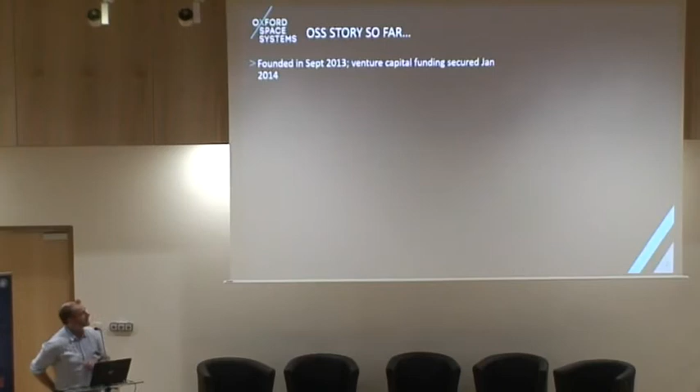So let me give you the quick background. Here's the short CV of the business. I founded the company back in 2013, but only really got going when I secured some significant venture capital investment in 2014. So I'll save you doing the maths. We're coming into our 5th year of life. And what we're doing is developing a new generation of deployable structures. And this is antennas, boom systems, and panel arrays.

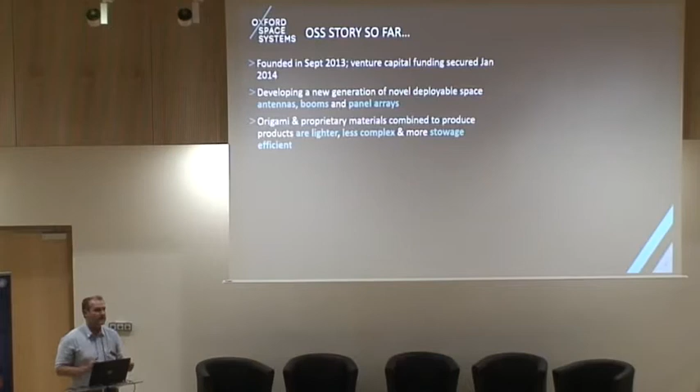But what we're doing differently, and the reason we managed to raise the level of VC investment we have done, is our approach is a lot different. We're very commercially focused, and we use proprietary materials that we're developing ourselves. And I've got an example here today. So you're obviously very familiar with carbon fiber. For those of you with fishing rods and tennis rackets, maybe if you're rich enough, a car, you could actually appreciate carbon fiber. Normally a thick, rigid material, not normally very flexible.

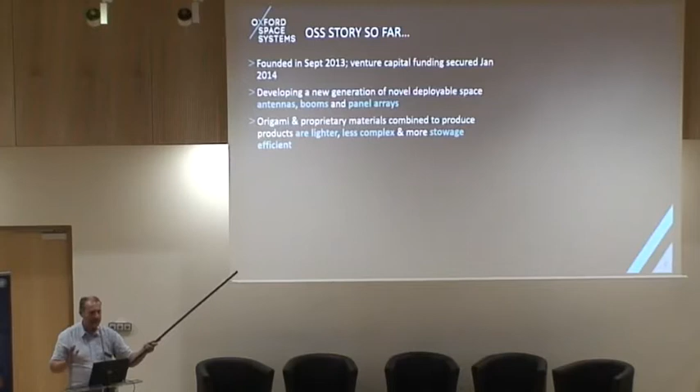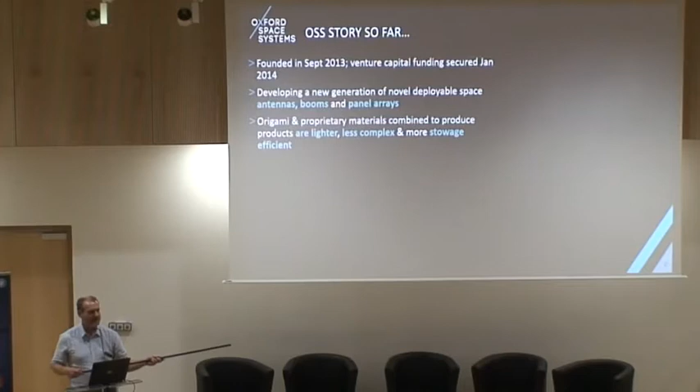So part of our intellectual property is playing around with the formulation of that material to make it do interesting things. So here's a carbon fiber roll. We can make it into a self-deploying structure. Now, deployable carbon fibers aren't new, but the IP we've developed is making this robust enough for the space environment and being able to predict its behavior when you subject it to things like atomic oxygen and radiation. So this is a simple material. This is the simplest thing you could ever make. I'll show you how we turn this into a product in the following slide deck. I can use it by throwing it around as well.

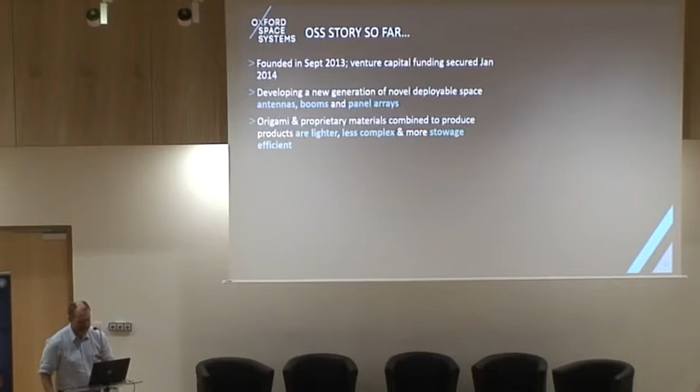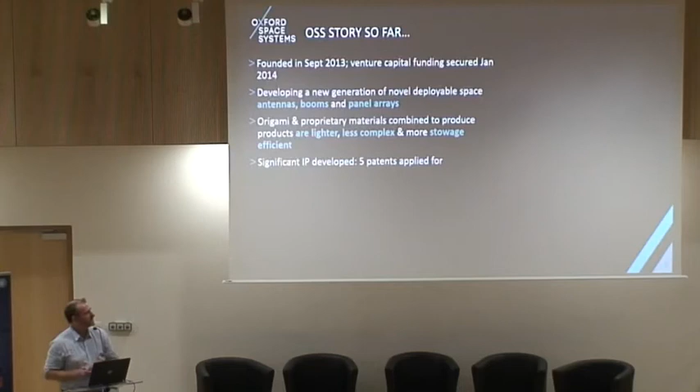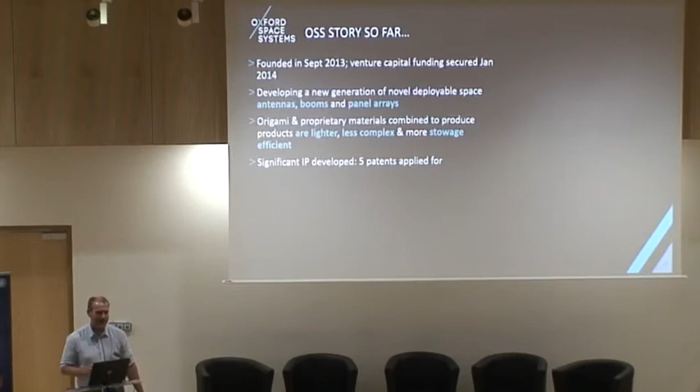So we develop a lot of intellectual property. We apply for formal patents. This is the stuff that investors get excited about, how much intellectual property collateral you have in the business. But I get more excited about IP that I call protection by complexity. So I can show you this material. It doesn't mean you can instantly go away and replicate my intellectual property. It's a bit like the Coke formula. So that IP is actually a lot more valuable than things we can put into patents.

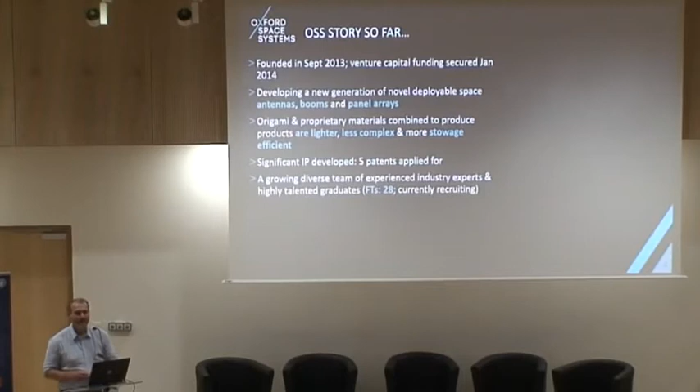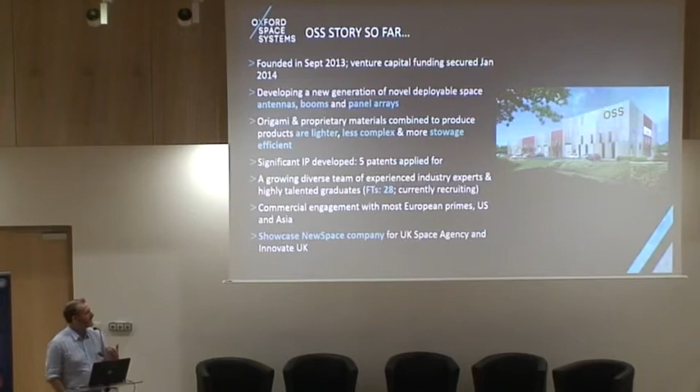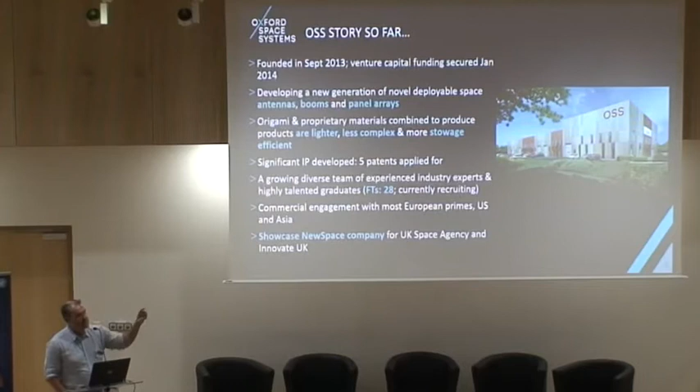We actually have contracts with most of the European primes, as well as satellite builders in the US, as well as Asia. So we've got some great commercial action. And we find ourselves the showcase so-called NewSpace company for Innovate UK, which is the UK government's innovation agency. And anytime there's overseas promotional activity for the UK, invariably OSS gets dusted off. And this graphic is aspirational, but it will be reality next month. This is our new headquarters that we're building in the UK to accommodate our commercial expansion.

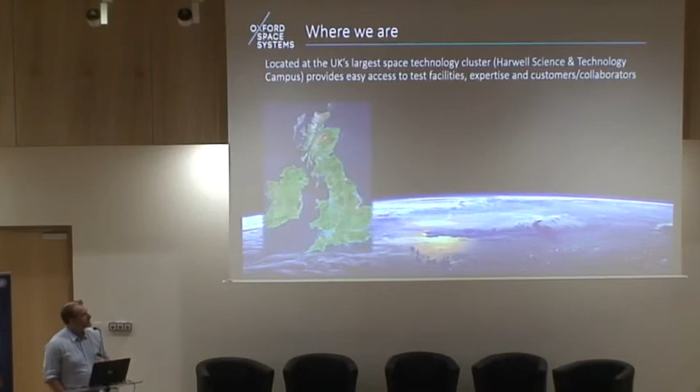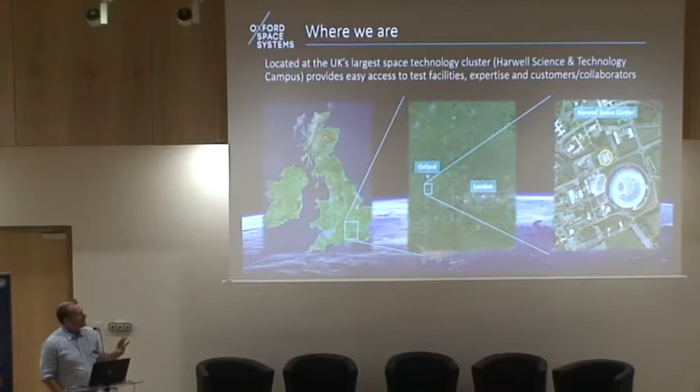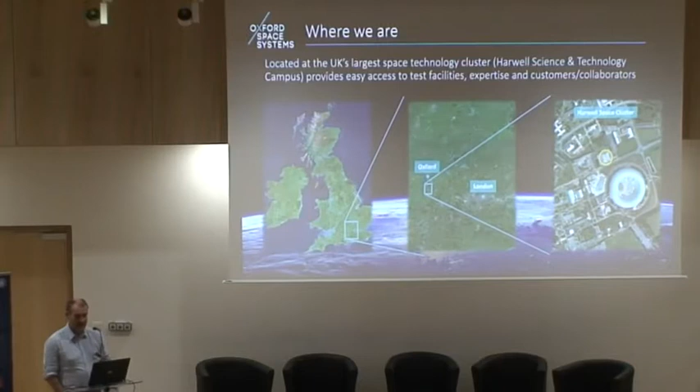I'll show you exactly where we are in the UK. We're about an hour outside London on the largest science and research campus in the UK. About 6,500 people now on campus. 80 space companies are actually there, employing over 800 people. And the government recently announced a £100 million expansion of RAL Space. So some colleagues from RAL Space are in the audience, so congratulations on a £100 million expansion to your facility. And that's actually putting in place more thermal vacuum chambers, environmental test facilities that commercial companies and academia can come and use.

Okay, on to what I want to talk to you today about. So this is a live development we're currently doing for a US customer. For reasons of confidentiality, I can't name the customer, and I've had to redact some of the material, or I hope the show has redacted some of the material, but we'll find out. So it's about developing a deployable parabolic antenna.

Ultimately, the customer wants a 5-meter unfurled antenna that will fit, ideally, on a 27U spacecraft. That's the challenge they've set us. They're willing to go with a 2.7 meter diameter for their first IOD. So we're under contract to demonstrate our capabilities to give them a 2.7 meter antenna, to produce this first TRL3 breadboard.

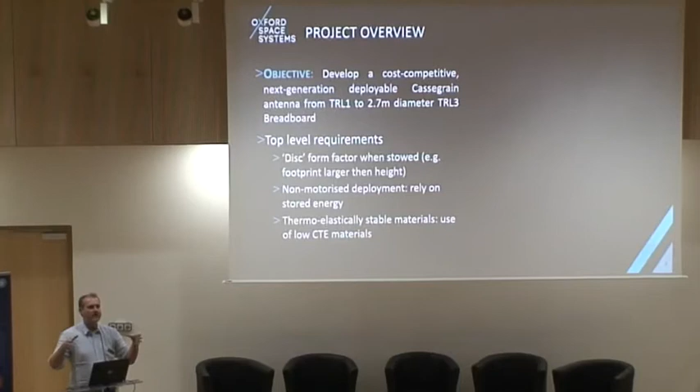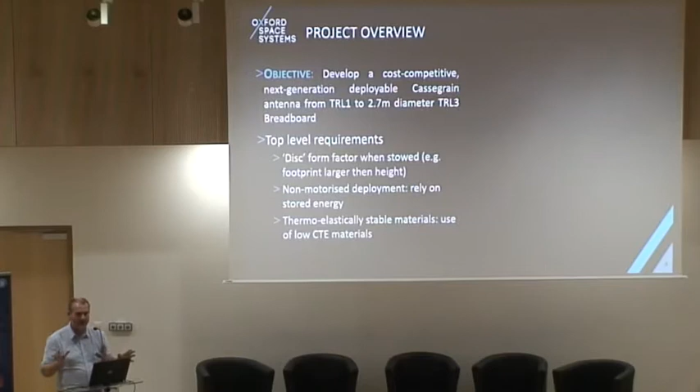So the top level requirements they set us: they're calling it a disc form factor. It looks like a sort of large donut when stowed. This is the target. They want it to sit on top of a 27U craft. Mass, as ever, is the general concern, so no motorized deployment, we don't have the mass for it. So they want it to rely on stored energy. And of course, it has to be thermoelastically stable materials to survive the space environment.

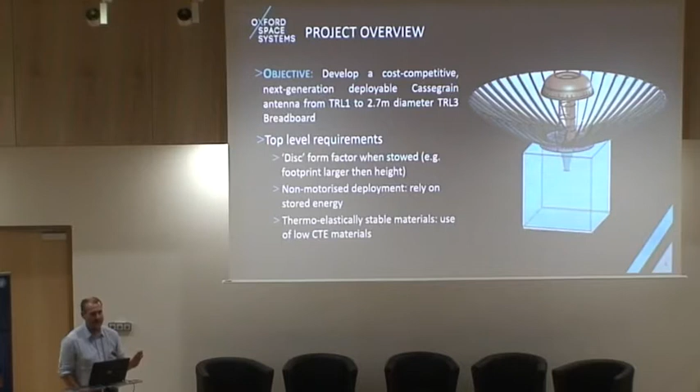So here's a very simple CAD image of the target that they've set us. And of course, being a commercial project, it could cost nothing and be ready next month. That would also be desirable. So very, very aggressive commercial timelines. To give you an idea of how fast we have to move, if they like what we're doing on this breadboard, they will want flight hardware from us within 14 months. Otherwise, we won't get the contract. That's how aggressive the US colleagues can be.

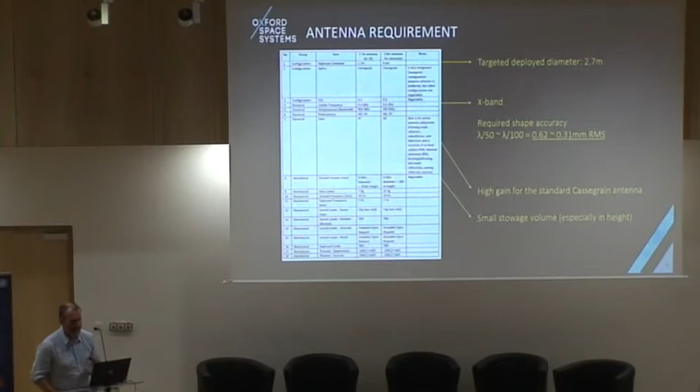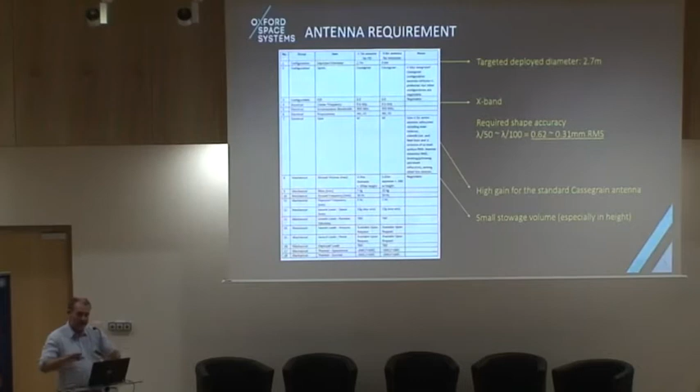Okay, I won't labour all the way down through the specification. But the top lines are: it's a 2.7 meter architecture operating at X-band. So you can probably guess the application. And that translates into the technical challenge of RMS surface accuracy, just how precise this parabolic needs to be when it's deployed. If you crunch the numbers for this typical mission, it comes out around lambda over 50 to lambda over 100, which translates into 0.3 millimeters of RMS surface accuracy across the entire parabolic, which is a pretty tough challenge for the deploying structure.

It's a Cassegrain configuration, which means we need a primary reflector and then a secondary reflector. Of course, the other thing is, as ever with CubeSats, the stowage volume is also an important concern.

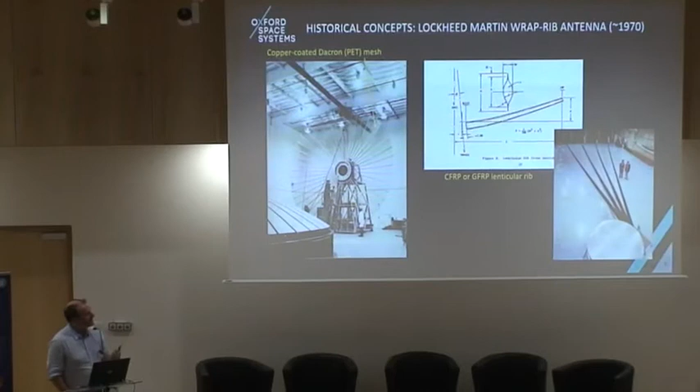So why are they using such large antennas? Well, Lockheed Martin come from the US Department of Defense background. Therefore, officially, no one knows what they're doing with these. But it's Earth observation and eavesdropping. But of course, if you come from a US DoD background, cost is not your concern. They don't really care how much these things cost, as long as they work. Our challenge is a very cost-effective architecture that's compatible with CubeSat budgets and Microsat budgets.

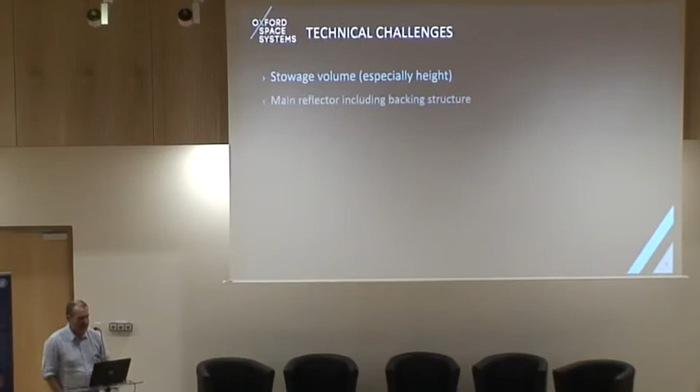So combining that knowledge of how you fold structures in a really novel way without creasing the surface is something we're now using. So we're actually building on a lot of work done by them. So the technical challenge, as I mentioned, it's all about stowage volume. That's an especially height constraint in this particular application.

I talked about the reflector backing structure being a big challenge. Ultimately, they want 5 meters. We're doing 2.7. And the reflector materials themselves, we want them strong enough, stiff enough to give us a reliable reflector surface, but we want them to stow as well without damage and survive.

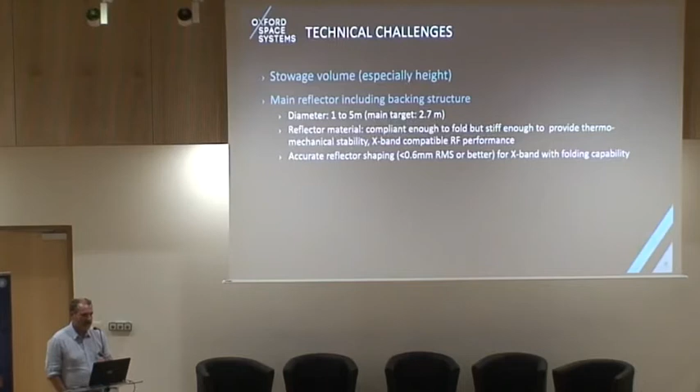In this particular application, it's X-band. Ultimately, we want this architecture to work up to Ka band, and that's a development we actually started in the summer with some support from the space agency.

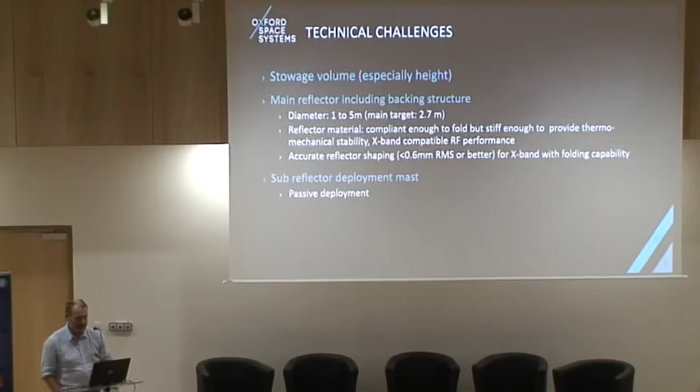I mentioned it's a Cassegrain antenna, which means we need a sub-reflector. And we set ourselves the challenge that, once again, we can't have motorized deployment for this secondary reflector. So, like the primary reflector, it has to be passively deployed using stored energy. Of course, if you're deploying something into the field of view of your primary reflector, the last thing you want it to do is impinge on the RF performance. So we want this to be RF transparent if we can.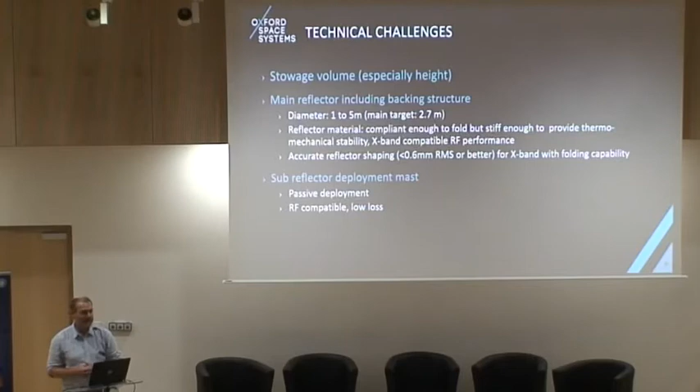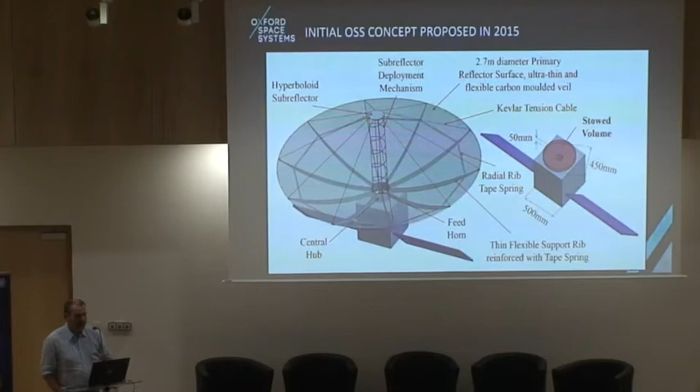So here is our early architecture. This is going back to 2015. This is when we first started talking to this US customer. You can see how we were evolving our thinking. You can see when it's deployed, we have some Kevlar cords, tension cables coming down. We actually discounted that, saying it was too complicated and was adding too much cost to the design.

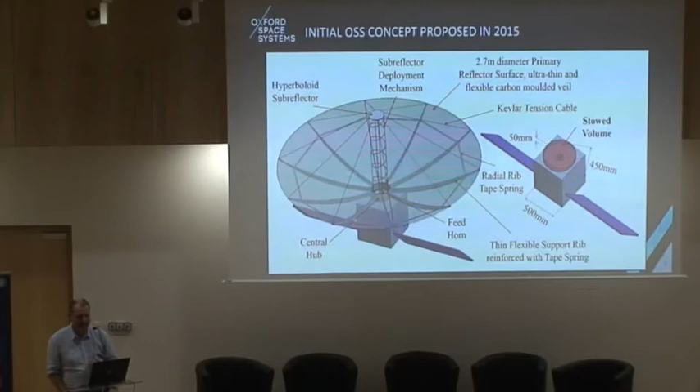So actually what I'm going to show you now is a refinement that we're currently working towards. You can see the size of the craft, roughly 500 millimeters by 450. Ideally, they want to get that a little bit smaller, as I said.

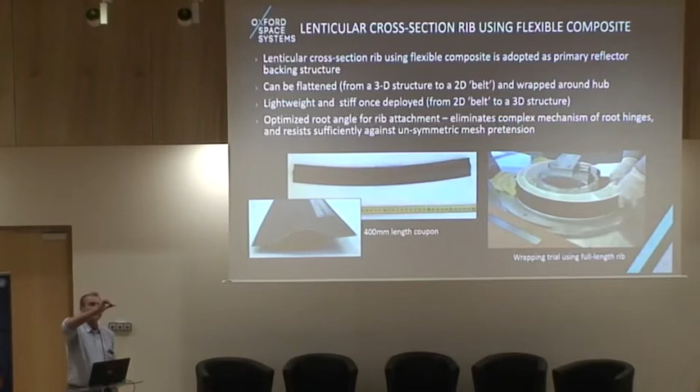So, taking our composite expertise, we designed and developed a very low-cost lenticular rib. And the screen's not fantastically bright, but I've got a little section here, probably the world's shortest lenticular rib. See the construction and hopefully the shape. And this will stow and bend as well. The bending is very small, but you get the principle.

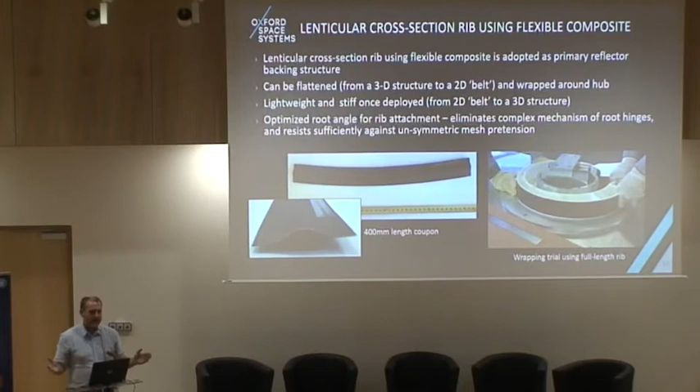So it's actually two sections of carbon fibre together, welded. Overcoming separation and delamination is one of the challenges that we've established on the project. These structures actually contain a lot of energy, so the challenge is how we wrap these carefully and repeatedly without damaging them, but also in such a way that when we release them, there's a controlled release of energy. So a lot of time and effort spent doing this internally to make that work.

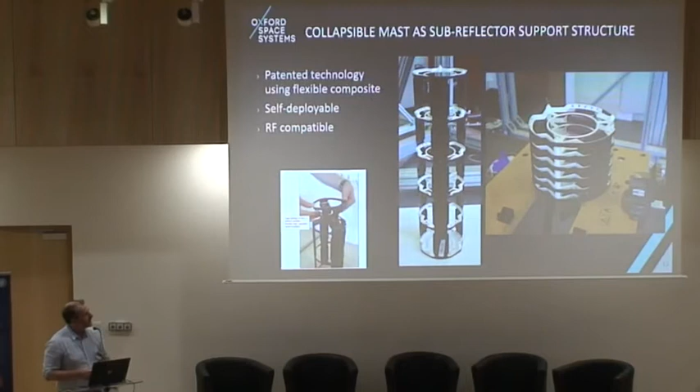And I can't tell you the exact formulation of the material because we did manage to crack the problem of making this not only RF transparent, but surprisingly compliant to this particular application. We have a patent in progress for this particular design.

As ever, it's not just a mechanical structure, of course, it's an RF structure. So I have some pretty heavyweight RF expertise on the team, so we did a huge amount of RF analysis, convincing ourselves this was actually going to behave as an antenna.

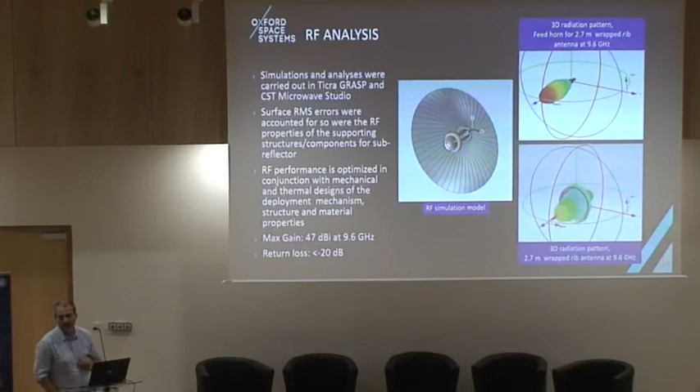I've been told this is a pretty good set of results, with a maximum gain coming pretty much close to what you can expect theoretically from this type of configuration.

No one is shouting out, so I'm assuming there's no RF expert.

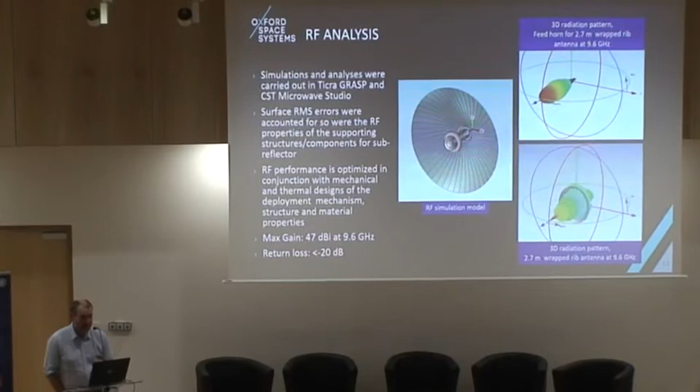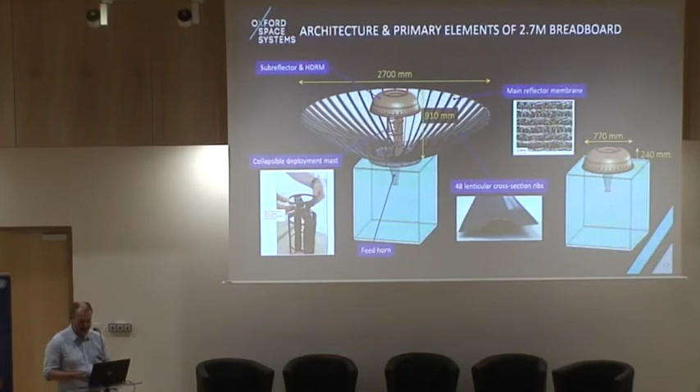So we looked around, could we make a flexible carbon fiber skin? We do actually have one of those on a separate development. But we actually started development of our own proprietary metal mesh. So for those of you that haven't seen antenna metal mesh, it actually looks a lot like ladies' tights, believe it or not.

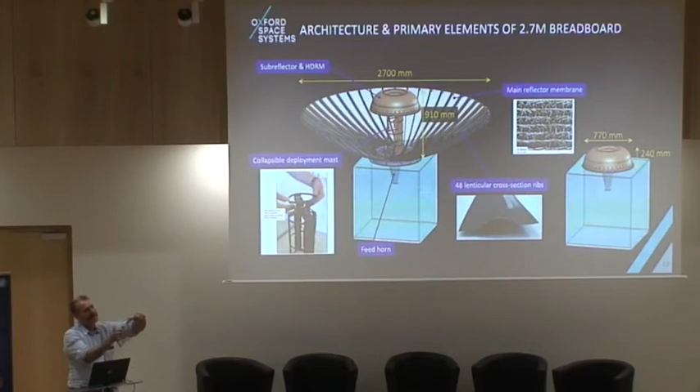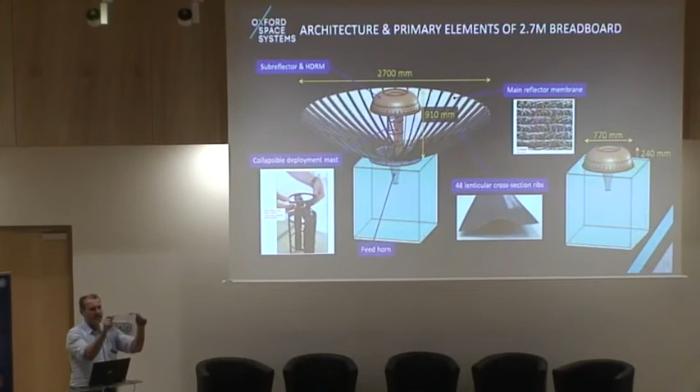So it's pretty indestructible. I think it's probably a secondary industry, making indestructible ladies' wear. So the idea is we use wires that are thinner than a human hair diameter. That's a proprietary knitting pattern, but it allows us, when we tension it, to actually remove all the surface creasing. So I can crush this up pretty damn tight, then when I stretch it, I actually remove all deformation in the surface. You can probably see some little features for those of you in the front row.

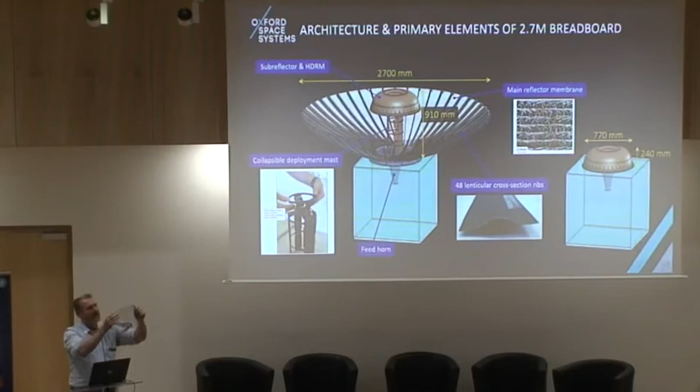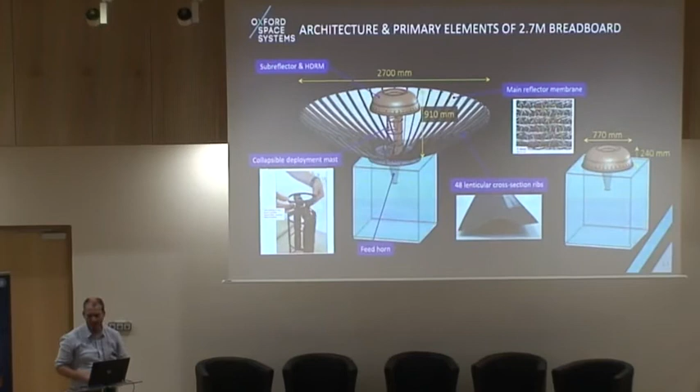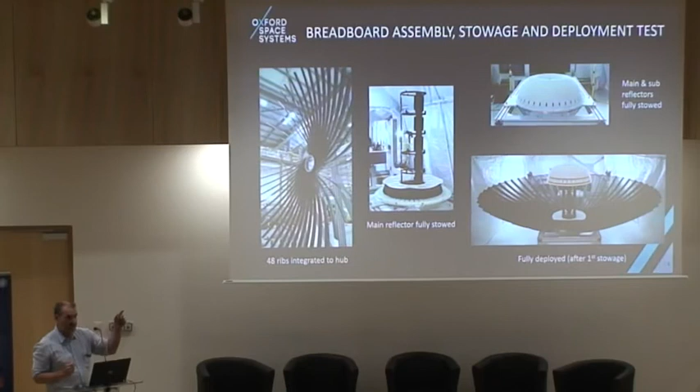And in the top right-hand photograph, you can see what I call the large white solid bulb. That's actually the secondary reflector. And you can see those little slots in that structure. The ribs, when stowed, actually interface to those points, such that it essentially clicks down into place. And then when we release that central mass, it pops the secondary reflector out of the way, allowing the ribs to come out. So it's a very low mass, very simple way of achieving a very reliable system.

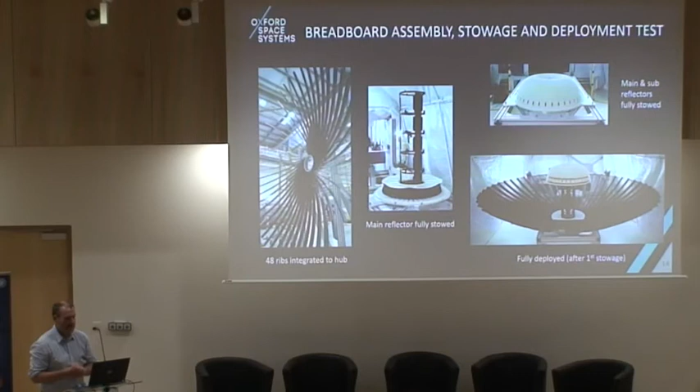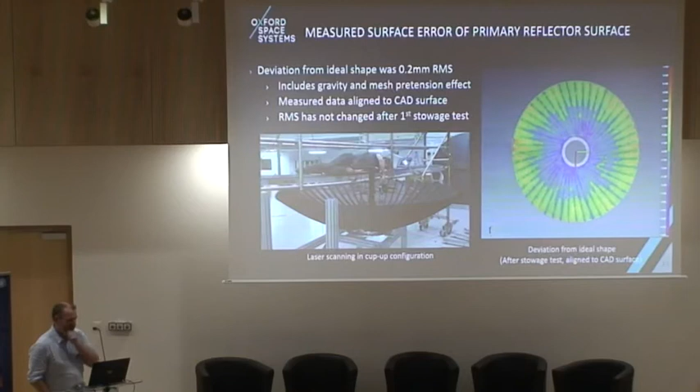But what's coming next? So to prove that we can achieve the RMS surface accuracy the customer is looking for, a lot of people historically put little laser targets, little optical targets on discrete points on the surface of the dish. But that doesn't actually give you the full surface profile. So we invested in a handheld, non-contact laser scanner. You can probably just see the guy hanging off a gantry in the picture. What he's doing is scanning a wand over the surface of the antenna.

And actually each pass of that wand generates 10 million data points. So it actually takes 2 or 3 days to complete a surface scan to give us what you see in that computer image on the side. And that means we can then take what we've measured in the real world and map it back to the predictions made analytically, so we can switch on and switch off gravity to verify we're actually getting what we expect to see.

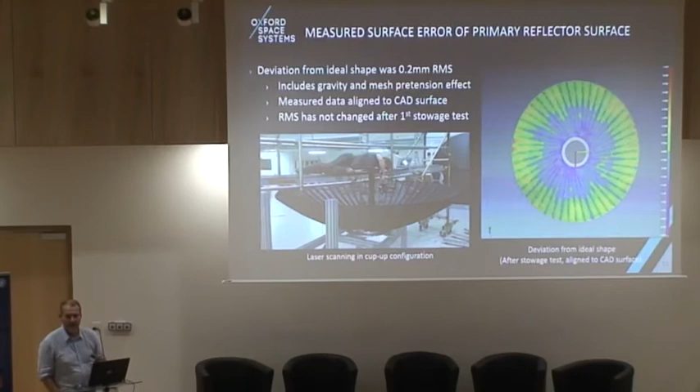So we've done a number of stowage and deployment cycles to verify surface accuracy. And we're actually exceeding the results we're looking for. So we're very pleased with this. This is very scalable. We can go down to around about 50 centimeters and then up to 5 meters.